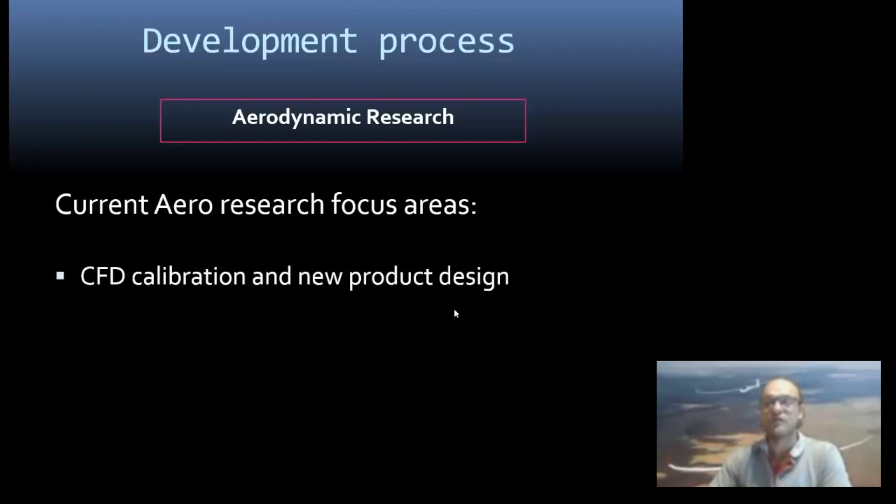The second interesting thing we are doing is using deep neural network frameworks for sailplane design using performance models and optimization. I'll just give a quick overview on this - it's some PhD work we're doing, and the idea is that we're using the computer to do the guesswork of how our profile should look, to stop us doing the guesswork.

And then obviously we're looking into suction, which is also a topic that Dr. Boermans will address tonight, as he is quite an expert on this. But we've also done some research on selected areas to see if this is applicable and if it could improve the performance of sailplanes.

Right, so let's get into a bit of the aerodynamic research. I'll give a quick overview, and I think a lot of you will be very familiar with the terms and might find it a bit boring, while for others it might be something new.

Conventionally we all use wind tunnels to develop sailplanes, and I think Delft University is one of the major players in developing new products with wind tunnels. Initially we also used wind tunnels - ours is at the University of Pretoria - but unfortunately the turnaround time takes about 6 months. Basically you develop a model, insert it into the wind tunnel, and then measure the flows inside the tunnel to understand the aerodynamic performance of your model.

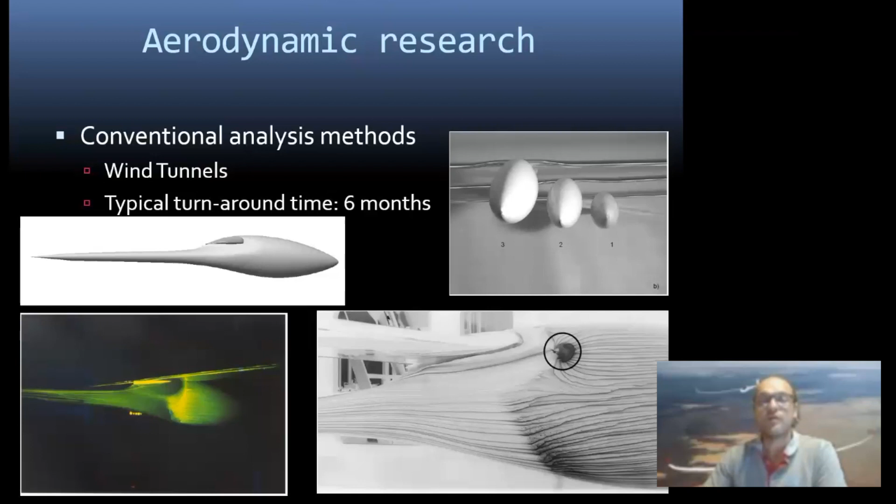The other method we're also using is conventional analysis methods, especially XFOIL, a brilliant 2D code. We're also using the KK Aero numerical panel method procedure to develop complex areas like around the fuselage-wing junctions. But lately we've found that the improvements in these performance areas are almost in the same order as the accuracy of the panel analysis method.

So if we would like to have a 1% or 2% improvement on the profile, the accuracy of these models is also around 2%. You don't really know if you will have an improvement. So we are using some different techniques now.

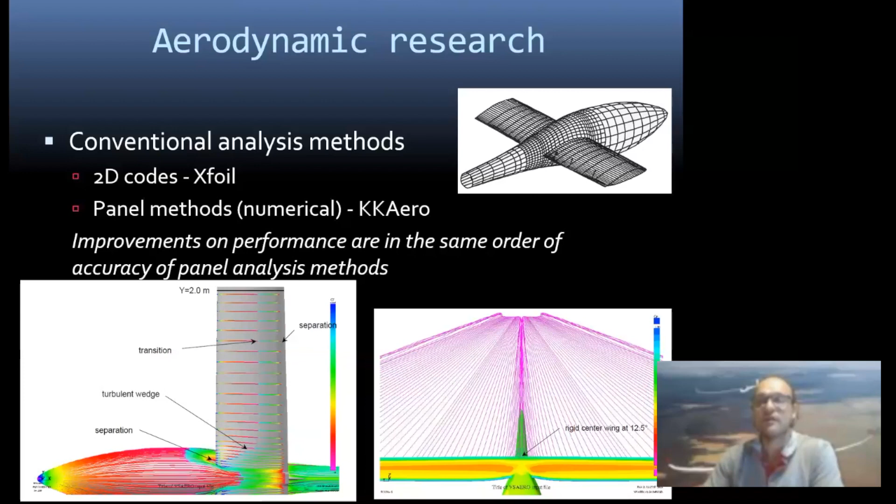This is where we start with computational fluid dynamics, where we're actually using a large mesh for the flow domain. But you have to use big computers, and luckily we have access to the cluster network at the university - they sometimes complain that we pull the complete computing ability of the university down when we run our simulations.

Initially it took about a week to solve some of these iterations, because it's about 8 million cells and 8 million equations that you have to solve simultaneously, and it wasn't possible 10 or 15 years ago. Nowadays, with the computing power available, this method is really a super method.

But maybe I should go one step back and take you back in the design history, to how we designed what we thought was the ultimate sailplane, the JS1. We're looking at around 15 years back on this story.

What we thought to do is model everything we're doing - we set up mathematical models to predict what we're going to get, and from those mathematical models we try to predict and design high performance sailplanes. So far we weren't very far out with our modeling, and we think that modeling saved us a lot of time. Basically, to design the best sailplane, you have to optimize the cross-country speed.

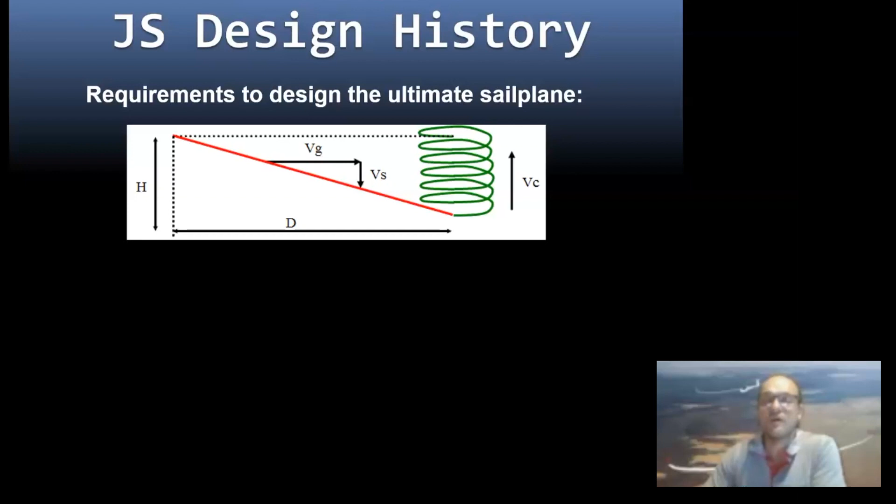We said the average cross-country speed was derived with a certain formula, and if you can optimize this formula, you will have the optimal sailplane for cross-country. We're still using this method in principle, but nowadays we use very complex integrated methods that take weather models, thermal models, and sailplane models into account. In the end, we see what the typical average speed is over different types of days, and what average thermals on what type of days will give you a contest win. So it's more about winning a contest than it is about designing for best L over D.

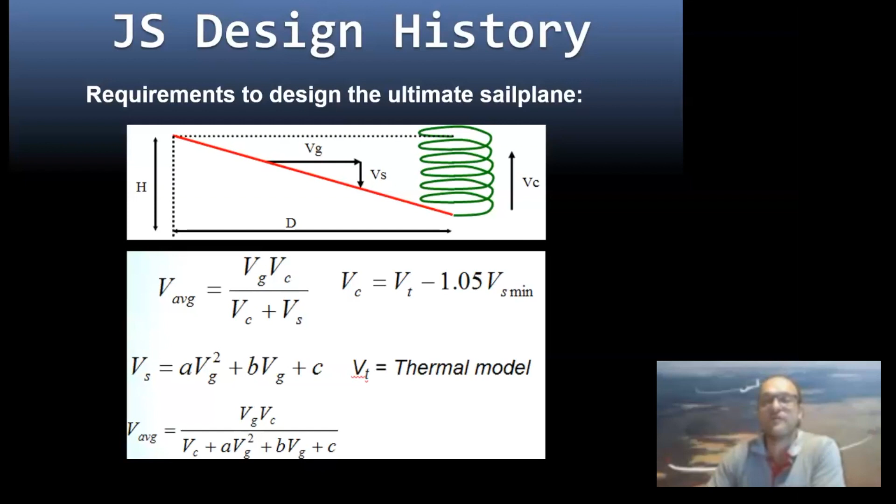Let's go a little bit further. Once we completed the design of the JS1, we calculated an L over D of 53, and this was actually confirmed by the Idaflieg that it achieved this. It had a very good sink rate, about 1.6 meters per second at 200 kilometers an hour, which we thought was a good glider. Then we thought, how do we improve on this glider?

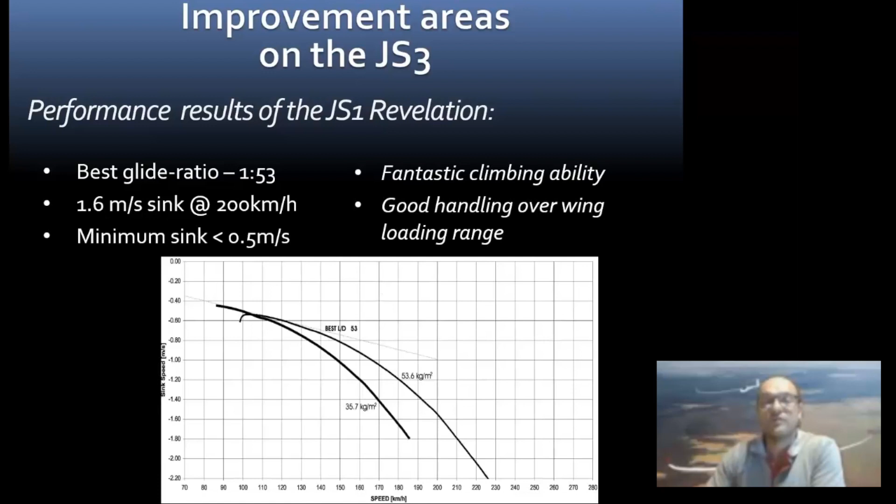This is where we started to look at it, and we call it the JS3 challenge. How do we improve on a good glider like the JS1? We looked at optimization of wing profiles, and this is where we come in with the integrated design of profiles, not just by defining a best profile. We're looking at what is the best profile to win a competition.

Obviously, we look at planforms. An elliptical planform is the best, and elliptical lift distribution is quite the best, so we are really pushing hard to get as close as possible to elliptical planforms. We always try to maximize the aspect ratio, because then the induced drag is limited, but this is very much limited by the stall speed requirements and by the limited span. So if you have an 18-meter aircraft and you want to optimize the aspect ratio, you normally run into area problems, and then your area is not big enough.

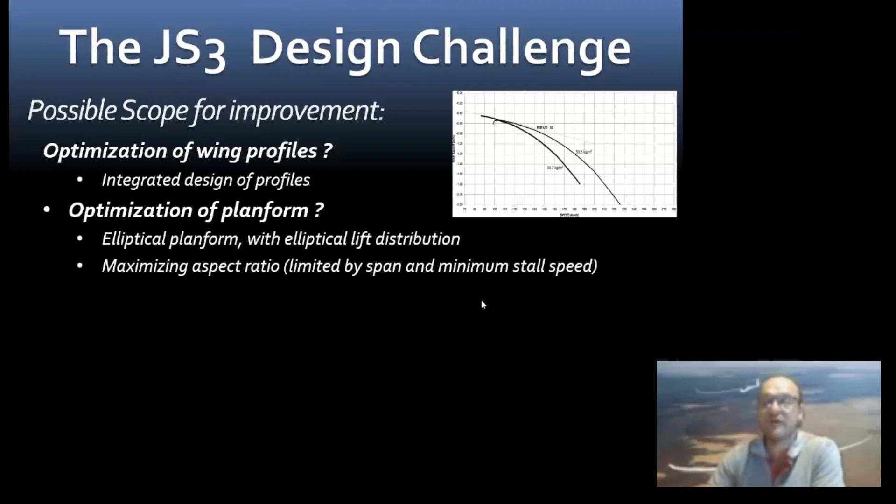So with the JS3 we aimed for the ultimate aspect ratio, managing the minimum stall speed requirements, which means a higher wing loading. We've proven with the JS3 that the maximum certified wing loading is 60 kilograms per square meter, and you have to design a profile with a much higher maximum CL if you want to go higher than this, but then you won't have very good high-speed performance. So with a high-speed performing profile, 60 kilograms per square meter is what we think is the maximum.

This is really where CFD tools came in very handy. So what are these complex flow areas we're talking about? Wing junctions, winglets, cockpit ventilation, fin-fuselage junctions, control horn fairings, tip wheels — those are the things we could solve with CFD in a very efficient way. We're going to run through a quick exercise to see how it works.

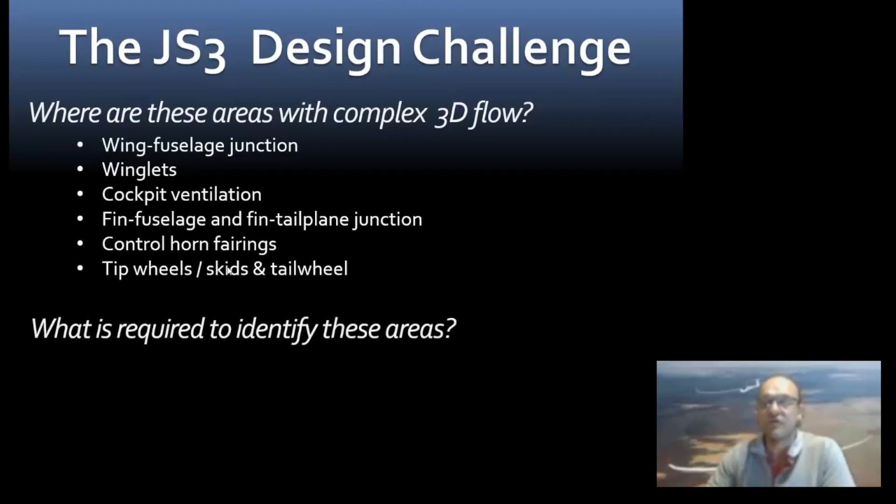We actually need a calibrated CFD tool, not just a normal CFD tool, because we need to predict the crossover from laminar to turbulent flow if we want to take advantage of these CFD tools. This is typically what a CFD will show you — where these crossover points are. This is not so easy to achieve, as these tools have to be accurately calibrated. We'll quickly talk about how to calibrate them, since that was one of the questions from the audience.

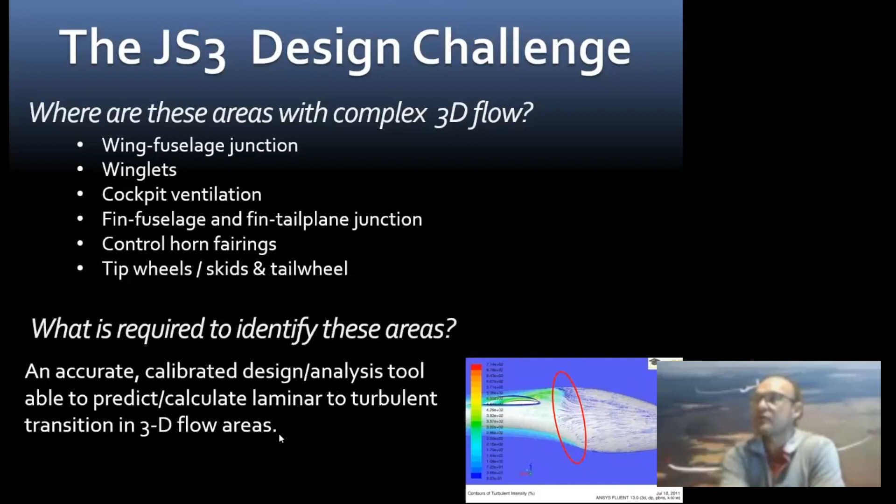But let's first put drag into perspective, because I think all designers, if you would like to increase the performance of the aircraft, really need to reduce drag. We thought that for the next generation 18-meter class glider, which we call the JS3, if we would like to have a 2-point increase from 53 to 55, what is required?

Let's make an example. Best glide is 110 kilometers an hour for a glider of 600 kilograms at 53 times G. It means there's about 111 newtons of drag to achieve that 53. And if you would like to have a 55, and you multiply this into the equation, you'll see that you need a drag reduction of 4 newtons to achieve 107.

This is what we initially aim for, to see how we can save Newtons of drag. Typically, that same efficiency at high speed will require much higher loss in drag, so we would need 8.6 Newtons of drag if we'd like to have a similar performance increase.

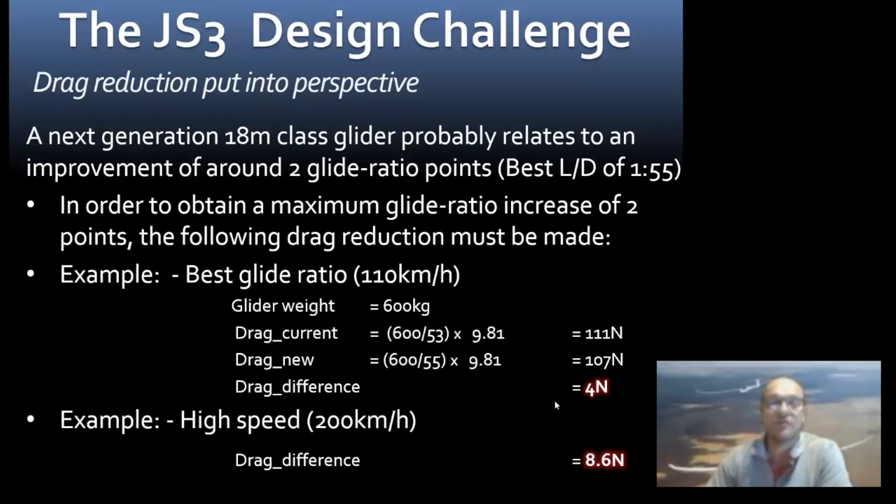Okay, let's see how we address these things. We looked at CFD, and I think all of you know nowadays what CFD is, but it was not able to predict these laminar to turbulent transition areas, and it was not really suitable many years back for sailplane design. But now with new transition prediction approaches in CFD, this is actually possible.

And this is what Dr. Johan Bosman in his PhD really looked into, how to tell the software where the transition areas would be.

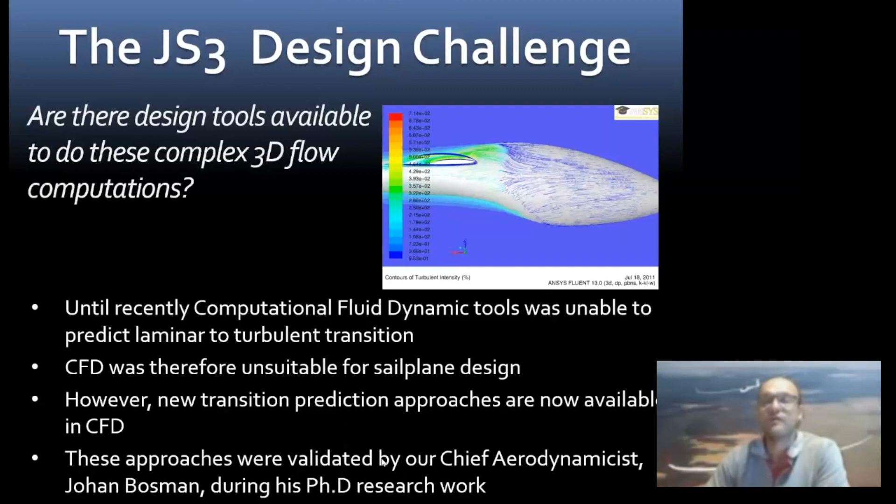So we all know that CFD is basically just a numerical wind tunnel. As you put a normal aircraft or model in a wind tunnel, you can put a numerical model in a 3D wind tunnel, which we call CFD, and you get very similar results. So let's have a look at the comparisons between a CFD approach and a wind tunnel approach.

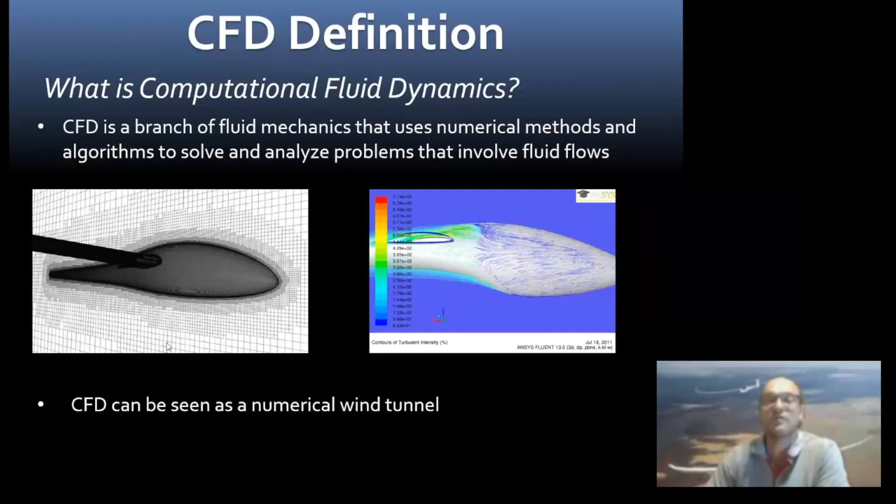In the wind tunnel, first, apologies, I don't know how to scroll up my presentation there. First you build a wind tunnel model, and this takes a few months to make it accurately. In CFD, you just generate an accurate CAD representation.

Then in the wind tunnel approach, you select a wind tunnel and test section, and here you generate a flow domain with boundary conditions. In a normal wind tunnel you select the wind tunnel test conditions.

Here you set up your flow parameters. You run the wind tunnel. Here you just press solve. Instead of running an expensive wind tunnel with lots of wind and noise, we just push a solve button.

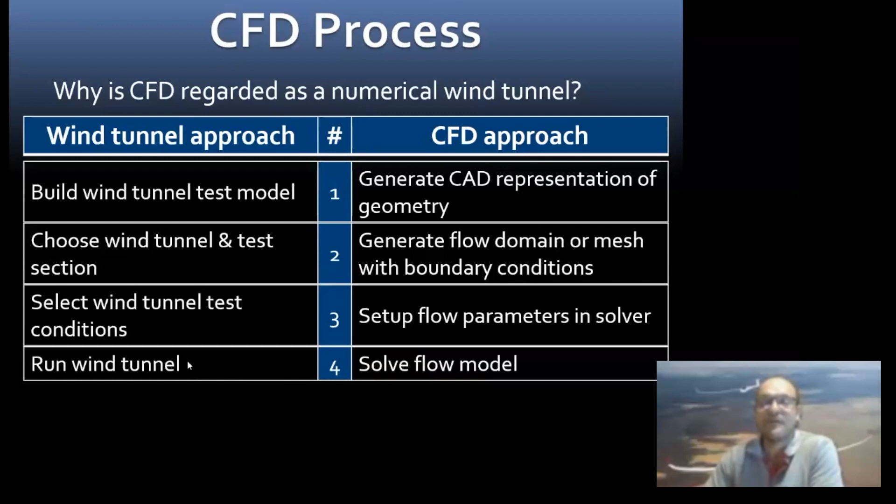Then we analyze the data, and you also analyze the data, and you repeat this step in an iterative process until your design is good. This is where we come in now with our neural network that we're busy developing, to bypass these steps of doing it manually.

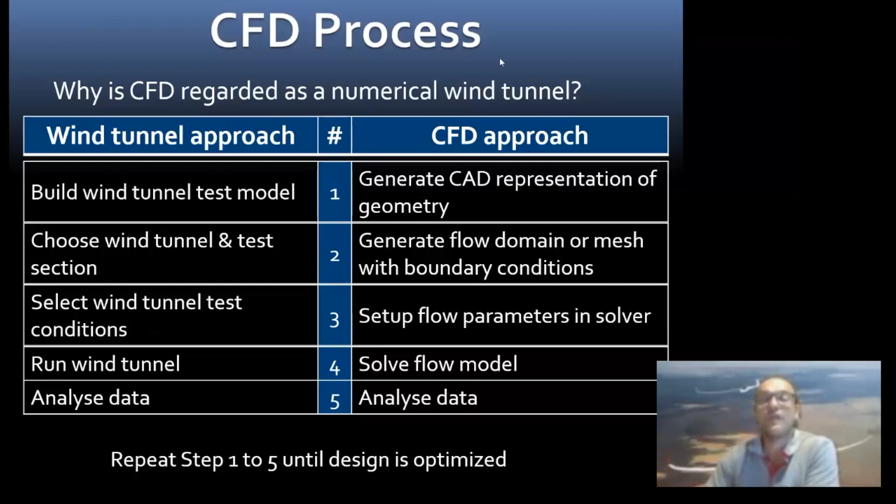So if we look at the transition models, as we just talked about, the CFD models cannot predict the transition accurately. Why is that? Because the Navier-Stokes equations are too complex to solve numerically. They have lots of terms, and these terms need to be truncated to make it solvable for computers. Because you solve it this way, you lose certain attributes of the formula, mainly the transition point.

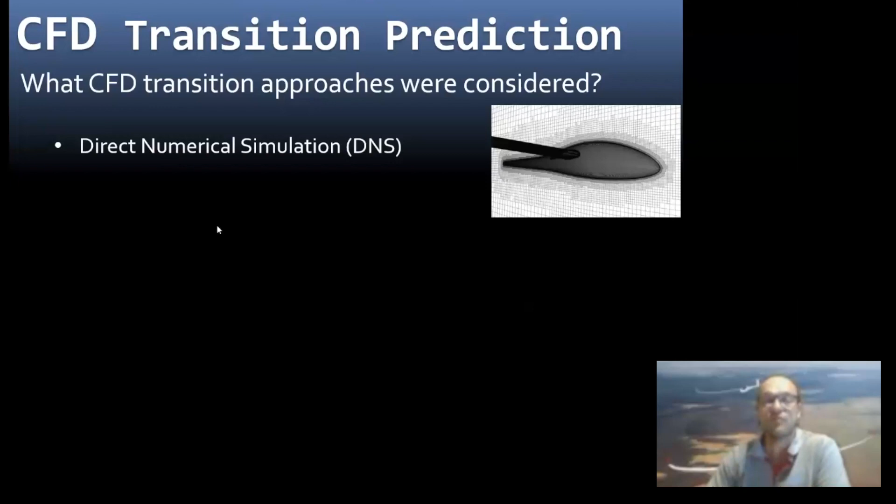Therefore you have to actually tell it where the transition from laminar flow to turbulent flow is. I hope Dr. Boermans will correct me if I don't say it exactly correctly, but there are a few ways how we could do this - how you do the Reynolds average, I think we're using these methods to tell the computer where that transition point will be. So the Reynolds method proved to be feasible, and the Walters model as well was chosen for certain validations of our simulations.

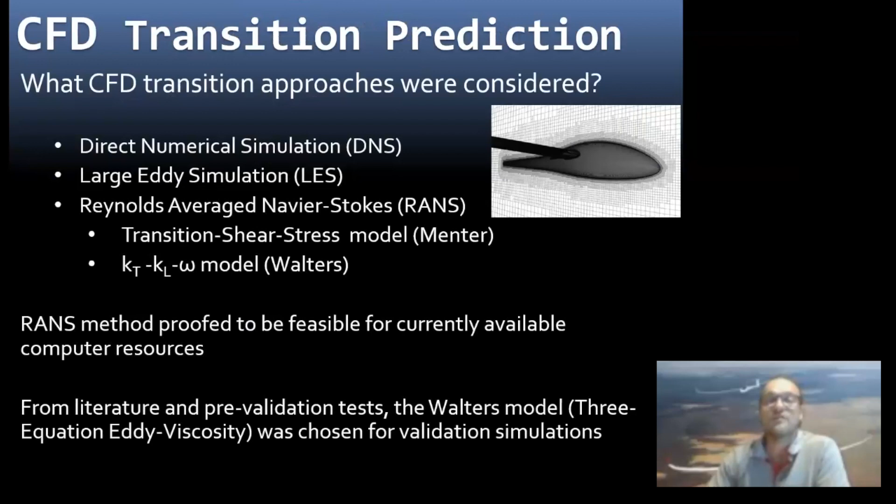Okay, but you have to validate it. Once you have selected the transition model, you have to validate it to see that you are predicting the transition from laminar to turbulent flow accurately. Therefore we looked at two cases which are very well known - we first did a 2D validation, and then we did a 3D validation. For the 2D validation, we used a very well-known profile, the NACA 653418.

We used a NACA profile where the measured data in wind tunnels is extremely well known. The NACA profile has quite an extensive, large laminar flow area with laminar separation bubbles on both the top and bottom surfaces. Obviously the drag decreases for larger Reynolds numbers, and tests were carried out in turbulent levels and the same conditions as experienced by an airfoil in a sailplane.

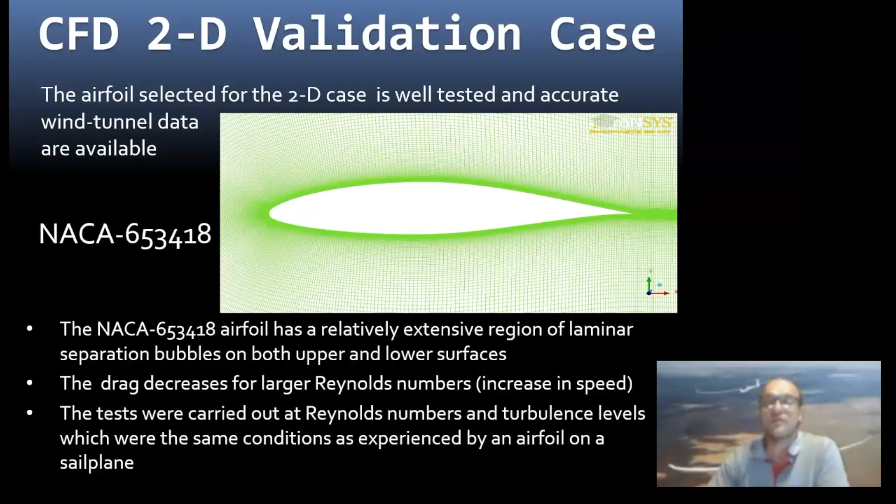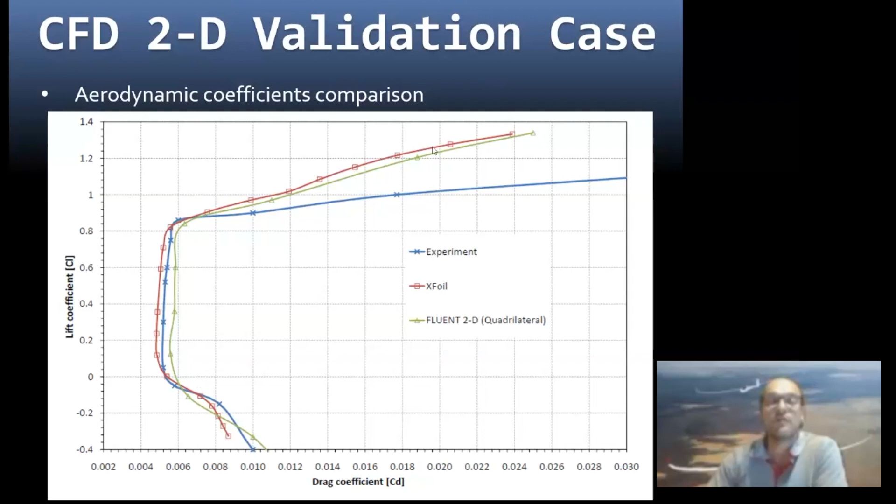So we used a few things to calibrate it, and I'd like to say that Dr. Boermans says we are continually working to improve the accuracy and the transition point optimization of the models, of the CFD models.

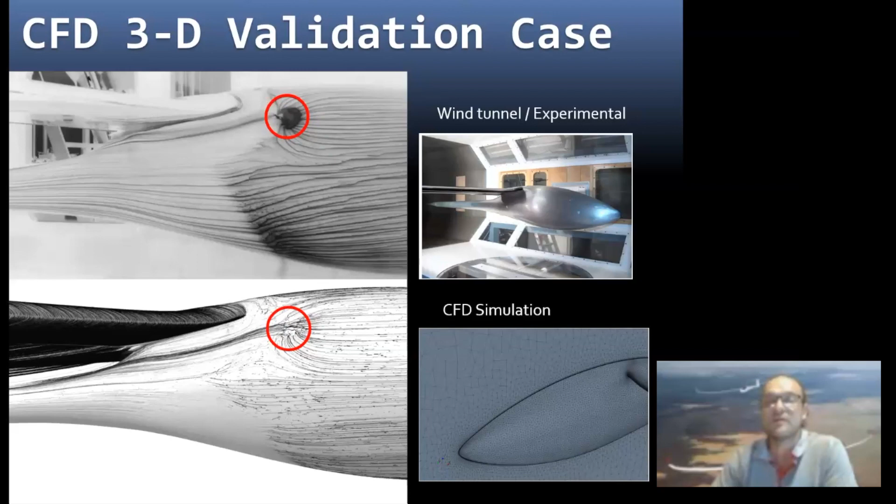Here you can see how it looks in the wind tunnel, and this is also a good indication of where the transition point is sitting, and this is what the CFD model is predicting. So once you have real calibrated CFD data, you can for the first time actually use it. If you just use a normal CFD package without calibration, you'll have beautiful pictures, but you'll never know until you fly the aircraft. These are validation cases - you can see the wind tunnel data compared to the Fluent simulation is very accurate.

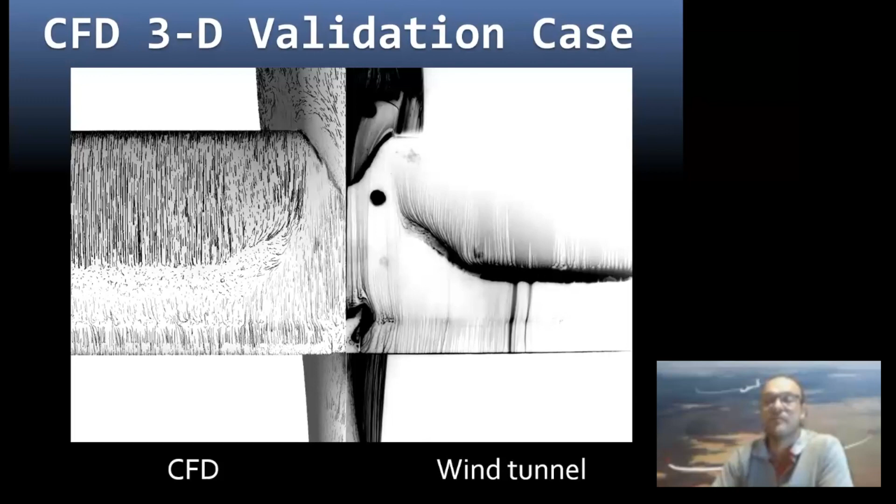And therefore, I think it was really the last 10 years that we've been intensively doing CFD design work, and we don't use wind tunnels any longer.

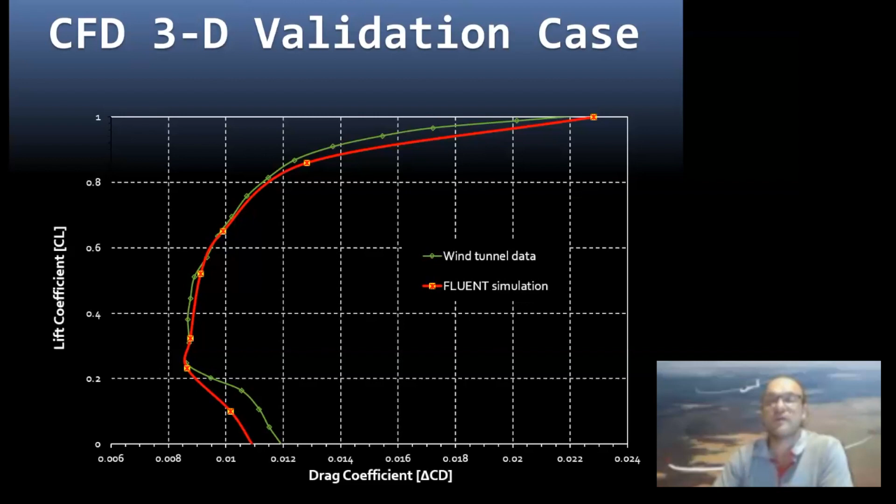So what did we do with this CFD tool once it was calibrated? We looked at a few options where we could optimize it. First we looked at the position of the wing, and it looked like we could have a reduction of 3 newtons just by moving the wing to the correct position.

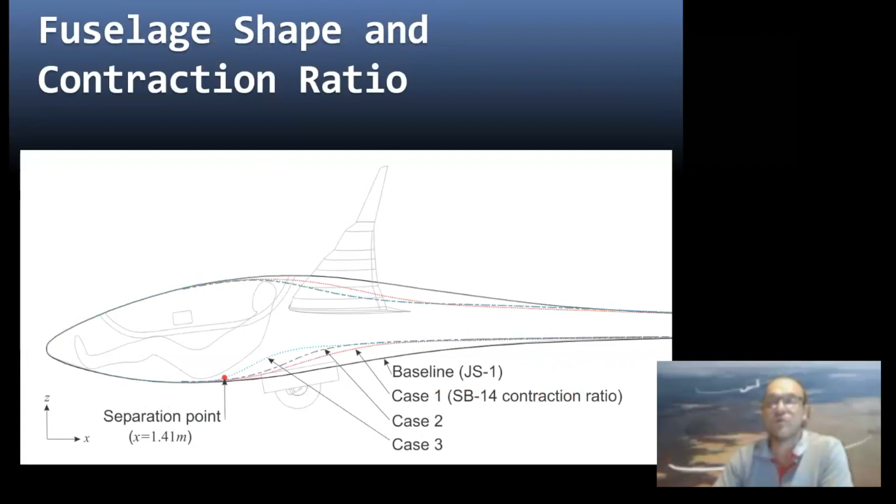We looked at a few baselines - the JS1, the SB14 - and then we also looked at 2 other cases to see what contraction is required to optimize the drag. We actually thought the quicker contraction would be best, but after running simulations we saw that case 2 was actually the best. It was not the smallest case, but this model gave us the best drag reduction of about 5 newtons. So we implemented the JS3 looking more at case 2.

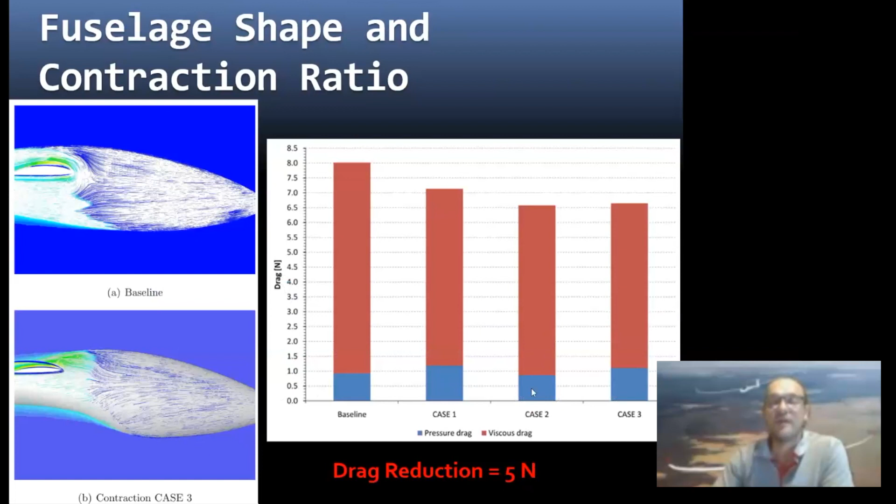Then we also looked at cockpit ventilation. This we had already implemented in the JS1. For the JS3, we had to move it to a less ideal position at the bottom of the fuselage, but the reduction according to our CFD was in the order of about 0.3 newtons. Not a lot, but it's there.

Then we looked at the control horns at the rudder positions, and we also used CFD for that - we looked at the flow and had a reduction of 0.4 newtons. Then we looked at changes in the fin area, and there we found 0.5 newtons.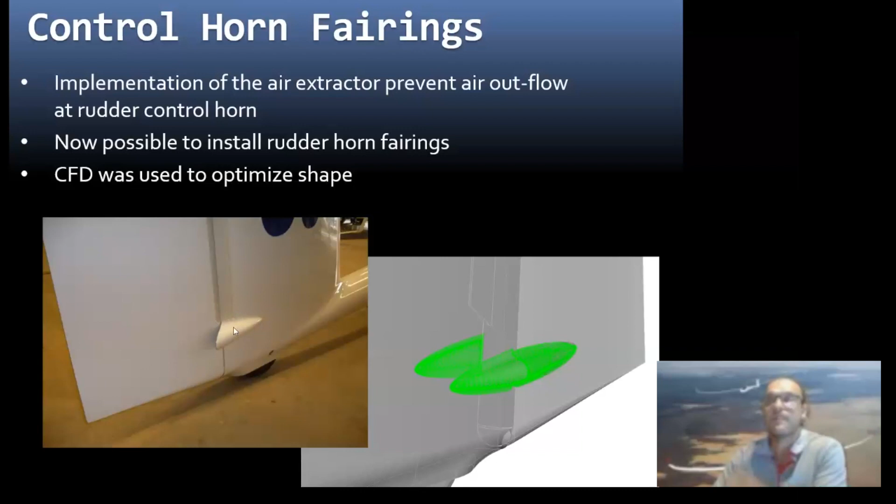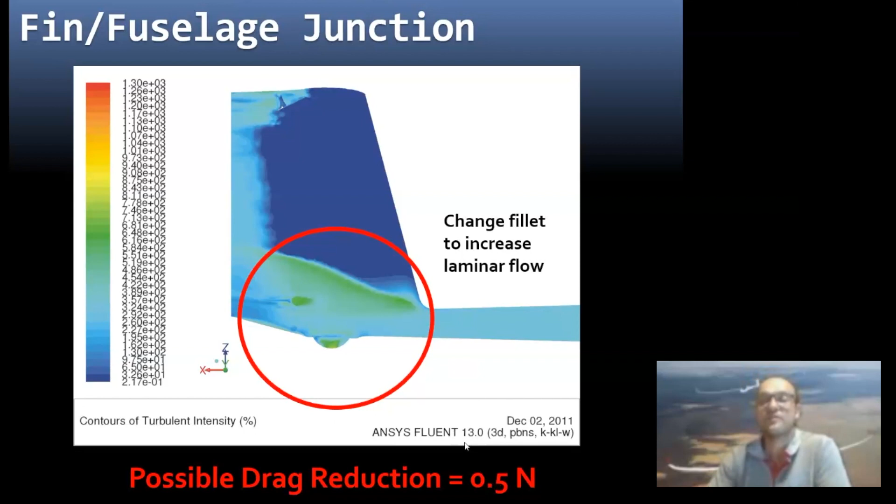The other one I didn't mention was root suction. This was one area we technically could not work out with the bug wipers in place, so we had to choose between root suction and bug wipers. But you can see that we could actually achieve 9.8 newtons of drag reduction for the JS3, except for that 0.6 that we could not implement.

Now, if you reduce the drag by 9.8, your glide angle increases from 53 to 58. So we could not get to 58, but our latest test results from the IDAFLIEG with the JS3 showed that we got to 57. So it shows that even with the data available from the IDAFLIEG, we managed very close to what we thought was the maximum performance available in a JS3 with the current technology.

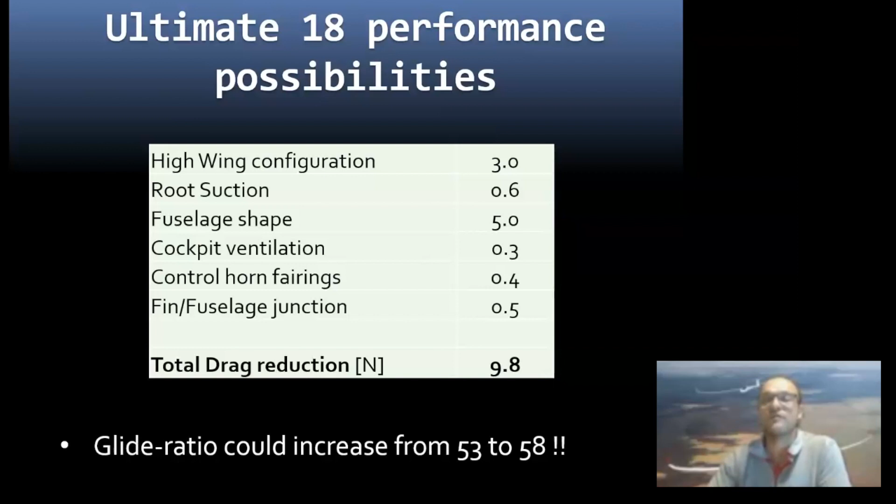So our CFD really proved the results, and thanks to the IDAFLIEG we could validate these results. Now we have a nice tool we can make nice pictures with. This is just how we've continued to calibrate our CFD. This is the JS4's winglet already, which we're doing some improvements and design work on.

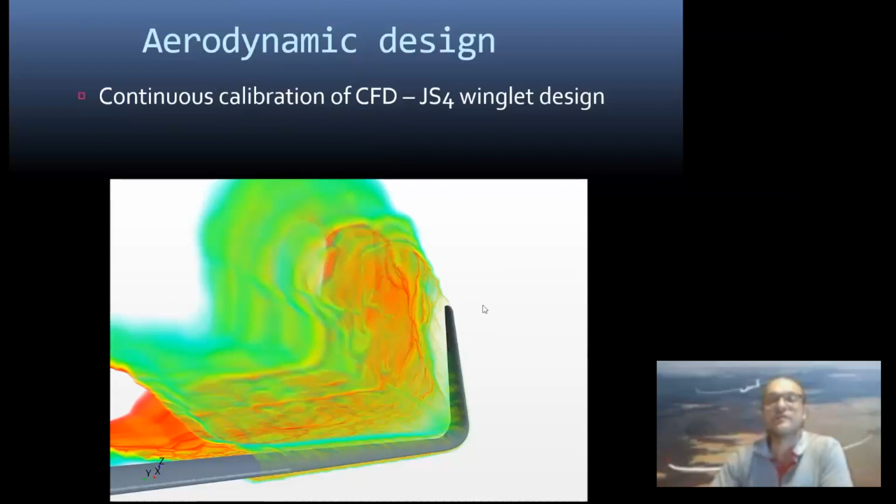You can see how the high wing of the JS3 resulted in some improvement areas. Once you apply all of these techniques, you finally come to an aerodynamic design, which you now have to sell to the structural team and say, can you fit your structure into this minute little shape? Then the conflict starts, because the structure guys always want more area and more enclosed volume, and the aero guys want less. This is where the process could actually start all back from the beginning. If the structural guy can't fit it in, we're back to the drawing board.

We're also doing some research flights. You can see here we confirm flow tests with our CFD results, and there's quite a nice comparison in this. You can also see there's a little bit of influence of the probe on the fin. It's one of the reasons why we moved the probes to the tip of the JS3. Not a massive effect, but there's a little bit of discrepancy that results on the edges.

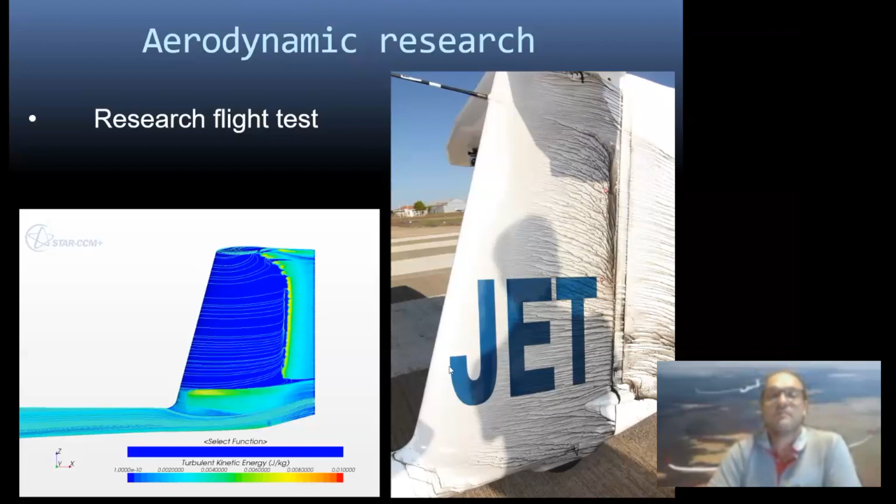If you can use a different method to do this guesswork, we can do it much quicker. This is one of the PhD studies we're currently busy with at the university, using a deep neural network framework for sailplane cross-country performance. I'd just like to explain what we think we're going to do here.

So basically we start with the seed profile and parameter constraints. For example, the structural guy will say you cannot go thinner than this, and the wingspan cannot be longer than this if it's an 18-meter span. Then we start off with the seed profile, the initial profile, and this is where we allow the computer, using neural networks, to design the profile.

Normally profiles are just designed using XY coordinates. If you look at a certain section you have those XY coordinates, and you have to define quite a huge number of coordinates to define the profile accurately. On a normal sailplane profile, I'd be uncomfortable with less than 2,000 coordinates, because with small straight lines you won't have an accurate one. I'd guess about 2,000 points would be close - I'm being corrected, it's only 200 points. With 200 coordinate points on the profile, you can actually solve it.

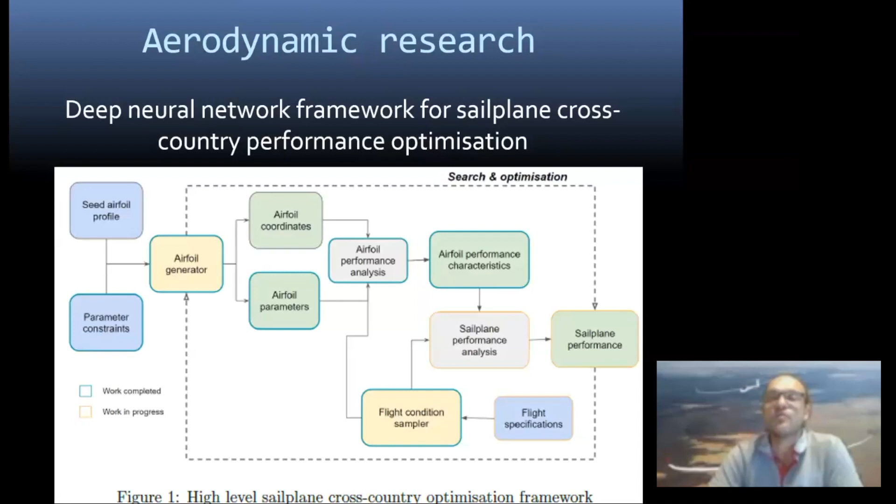One of the other studies we've also been doing is on suction. We've been following what Loek Boermans is doing with suction, and it's quite interesting - we're quite excited about the work that's been done in suction, and it could actually result in major performance increases.

However, the technical question is still not solved. But we looked at what areas we can actually solve. So we selected the fin to see what the performance scores are if you actually use suction.

So now I'd like to go back a little to where we were earlier in our design process. As I said, we did aerodynamic research. I showed you how we do the aero design using a bit of CFD - I can actually say a lot of CFD, or almost only CFD at this moment. And then we hand it over to the structural design guy.

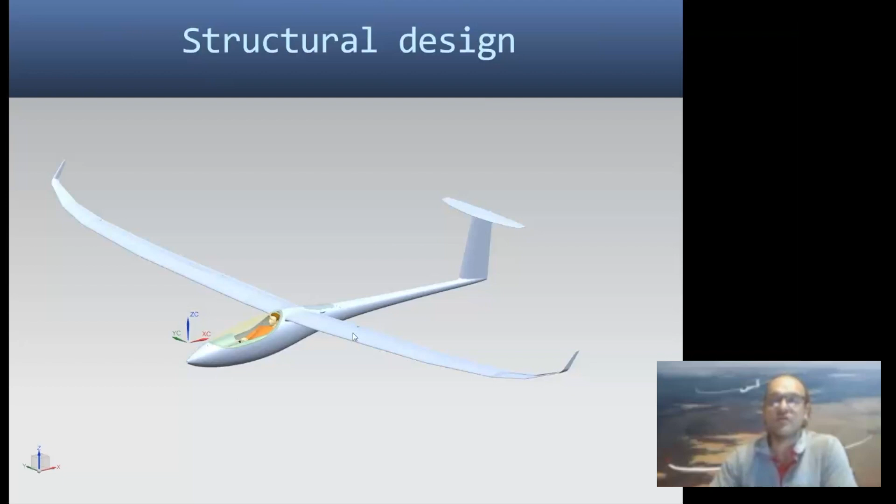This guy is where the conflict starts, and he needs to first design for the fuselage, for example a stress skin design where all the loads are transferred and required inside the skin. He needs to do a bit of structural reinforcement in the cockpit area to meet the 9G requirement. As you can see how this is developed here, this is to transfer all the loads from the fuselage into the wings. You see a couple of bulkheads for the engine.

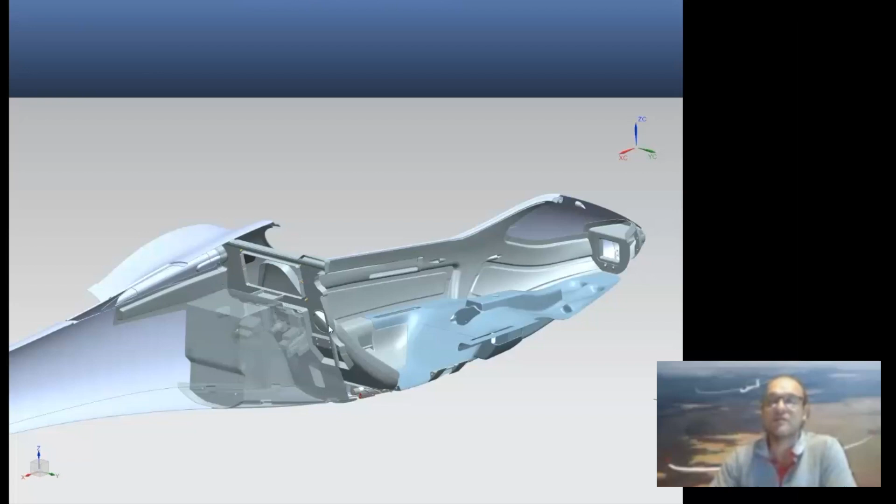And then we run our FEM analysis on the structural analysis. So we mainly do FEM analysis backed by hand calculations. And then ultimately we test the structure with physical tests for certification. It's a bit easier to convince the authorities if you do an actual test than to give FEM results.

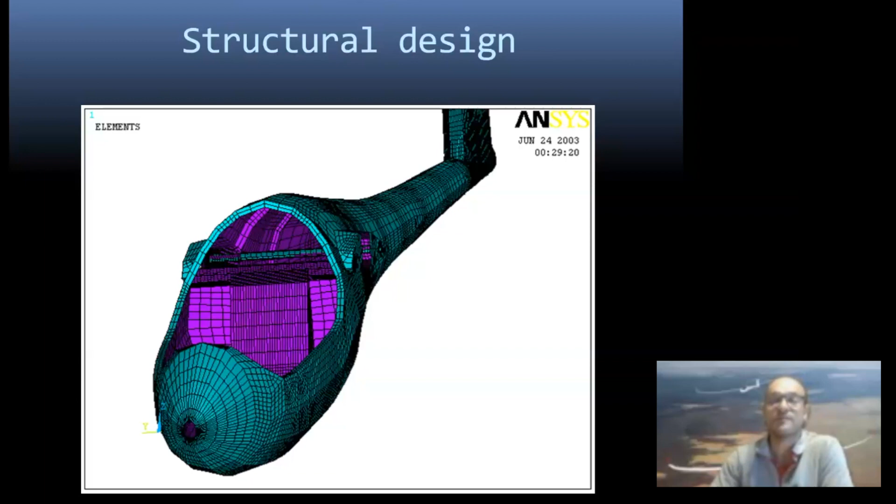And then the detailed design follows. The detailed design consists normally of the control system design, the aerodynamic design, the ergonomic design, and the power plant design. So if you just look at one system that I've selected, for example the landing gear.

Traditional methods would have shown you - if we just use normal methods, we're using a lot of Excel to model again. So everything we're doing is done by Excel. Even though we're using expensive software packages like NX from Siemens and could do modeling in quite a nice way, you have much more control if you do the design in Excel.

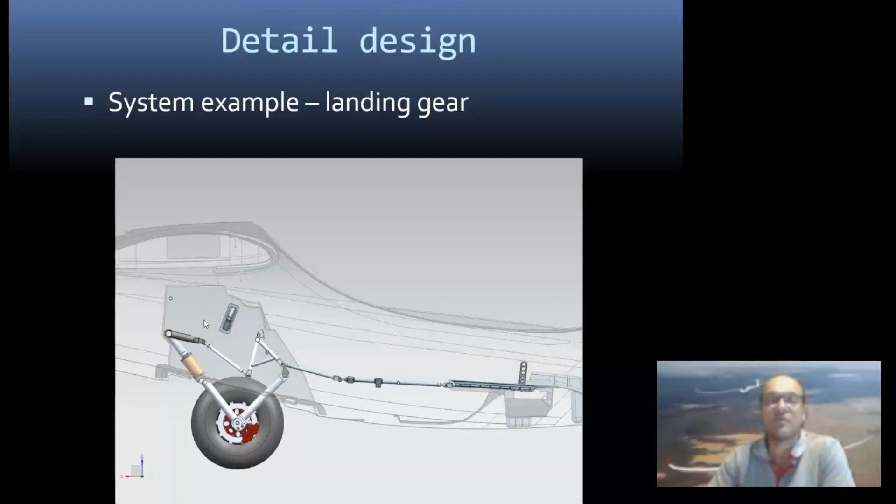So for example, if we designed the landing gear on the JS1, we modeled it and actually made graphics with a slide bar showing how the retraction and extension of a landing gear works. And then all the loads are telling you what the hand load is, so you could see how hard the landing gear would be to retract.

But by manipulating it with a few other bell cranks, we actually designed the JS1, JS3 landing gear so that by the back end of the lever, where you don't have a lot of forces, the forces drop to zero. And this makes it very comfortable to retract, even for the smaller or female pilots.

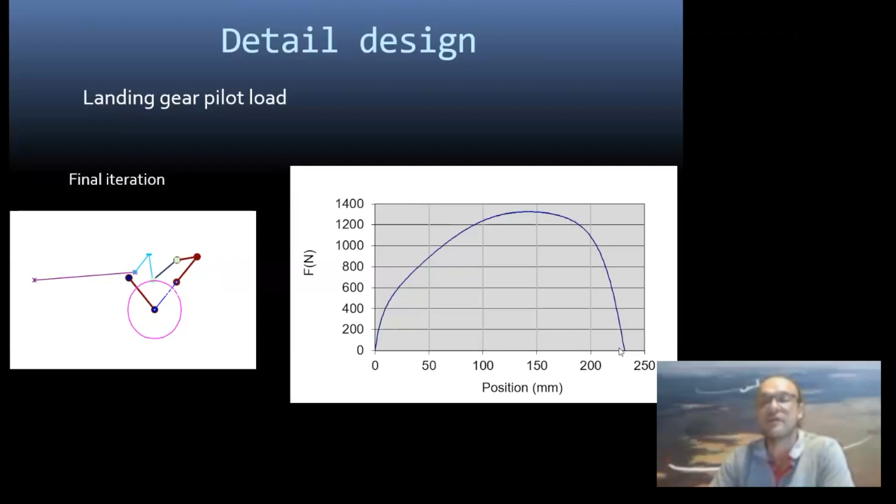As you can see, a very small shell, and everybody's fighting for space. If you can now imagine, you have to fit in a wheel, a control system. You need to find room for the seat pans, the seat back, instrument panel, cockpit, and then even you have to fit in, as we like to call them, the idiot behind the stick.

And most of the problem is to create enough space for a larger pilot without compromising the aerodynamics too much. And this is where I think with the JS3 we found quite a small cockpit capable of fitting quite big pilots.

The mannequin that we selected here was a 120 kilogram pilot, 2 meters tall, if I recall correctly. So we aim for 120 kilograms, 200 centimeters tall, and it seems if they are fitting in.

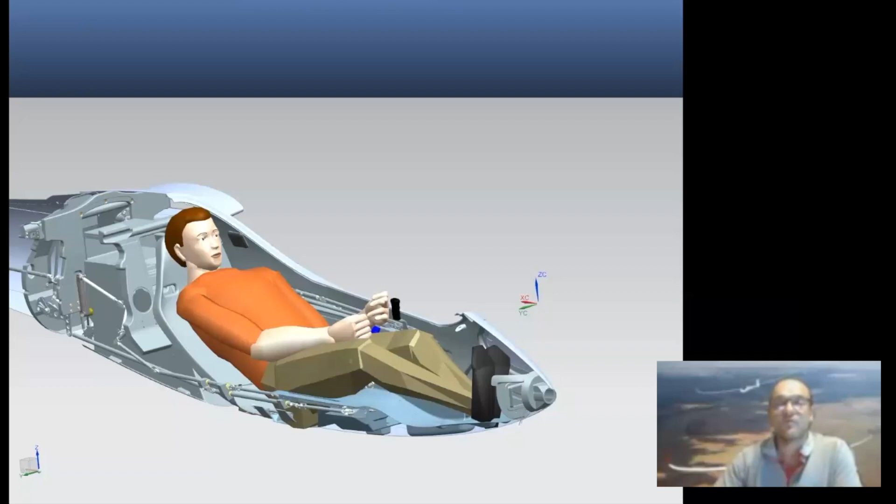If we look into the other structural design areas, you can see how we have to design all these bulkheads and things into it, and also the power plant, in this case the jet one. As you all know, we're busy now with the rear electrical propulsion system, which we will start to integrate shortly.

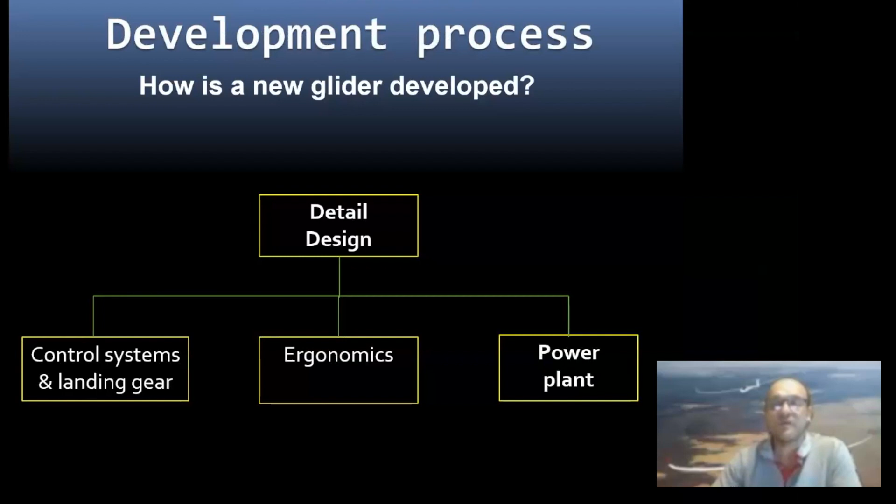We already have tested all the platforms with it, the pure gliders, and the electrical system will be installed shortly. You can see everything is fighting for space here. Once this is done, we move over to prototyping, where the prototyping needs to be constructed. We're running slightly out of time.

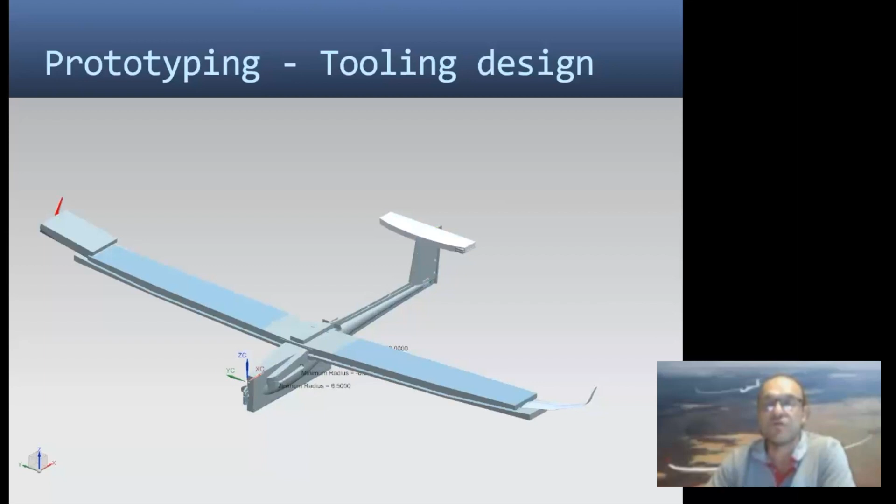I'll just quickly show you how from the model we start to design our tooling. That is the tooling boards and the jigs for the wing molds here. You can see this is typically what a mold looks like, with all the jigs to hold the parts. We have to design tools and jigs to do the integration between the wings and the fuselage.

I can just say that on the latest product, our JS3, the wings were completely built separately, and the fuselage on this side without any integration, and we just push the wings in and they fit without any interference issues. The fuselage is typically looks like this, the plug that we design.

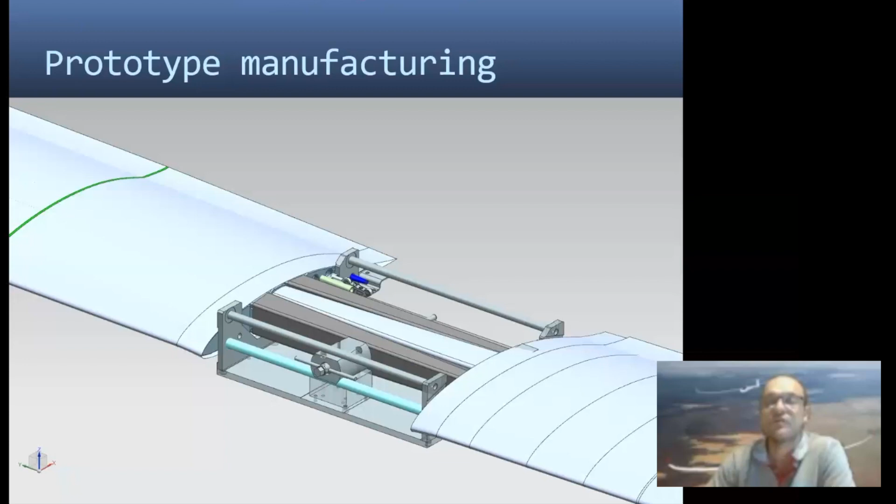And if we do it in real life, we CNC machine it out of MDF, or superwood as it's known in South Africa. The superwood is then carefully positioned on accurate jigs, and then you start to finish this mold by hand. You can see this is the plug now prepared for the mold.

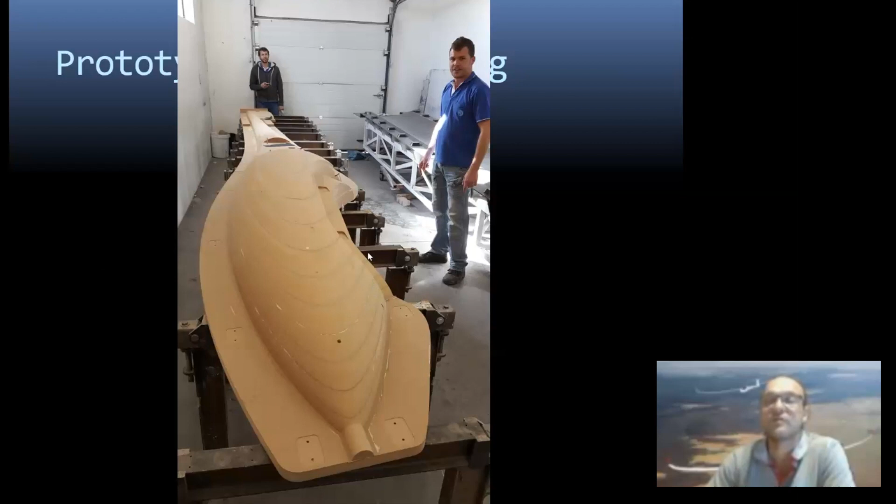And pulling the mold out, a little later you have the actual mold coming out of the plug. This is what a typical mold looks like. Once you've designed a mold in all the inner sections, you spray the mold and start the structure layup. You can see that's the skin there. You do the internal component installation.

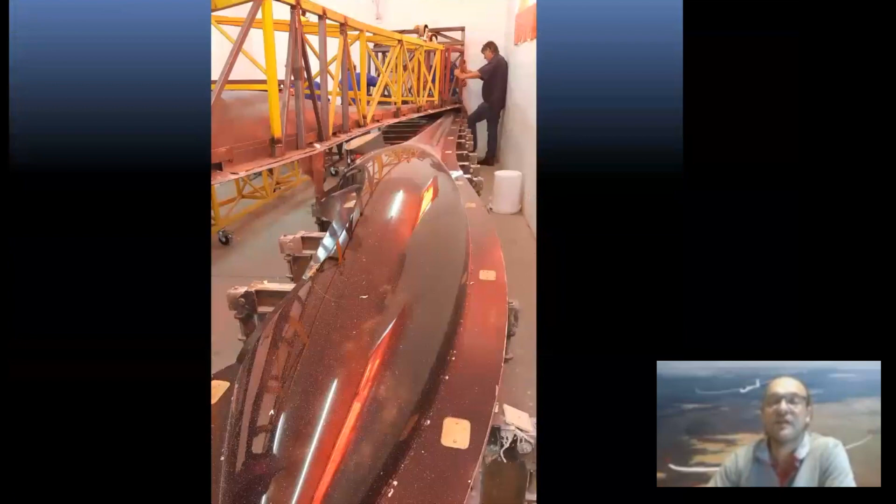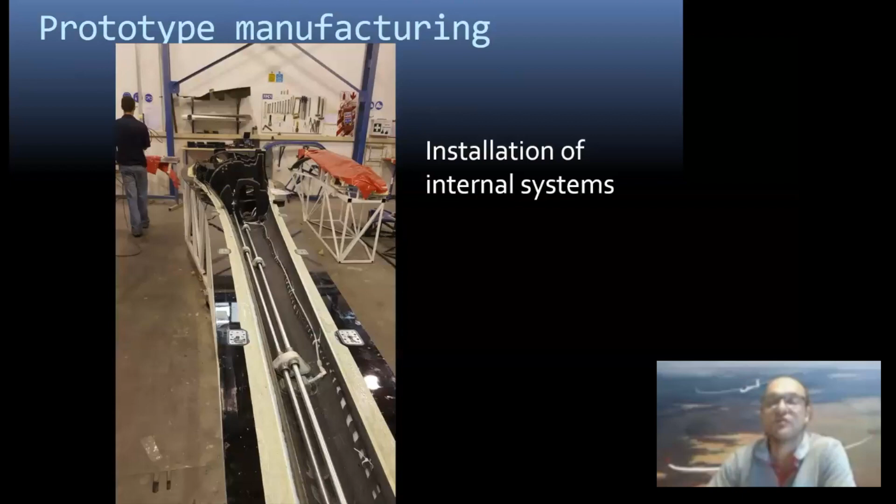And the control system - this is the mixer system in the CAD, and this is the actual one. Then you have to close the two fuselages together, and demold. It looks like not a lot of work, but this could take up to 6 months to do the jigging and tooling correctly.

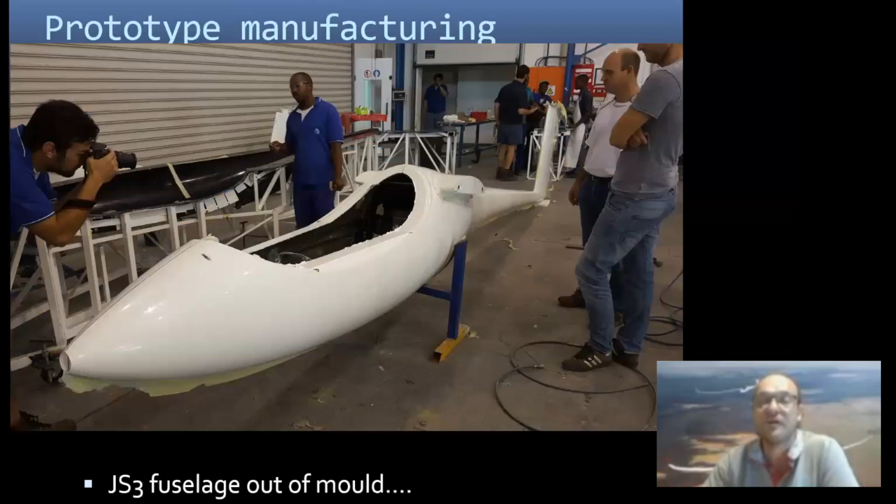And then you have your first fuselage, and obviously the chief design engineer who tried to fit in a 120 kilogram pilot just wants to check if at least he can fit in. At least that would be the first prize. If the chief design engineer can fly his own aircraft, it would have been a bit disappointing if he can't fly it.

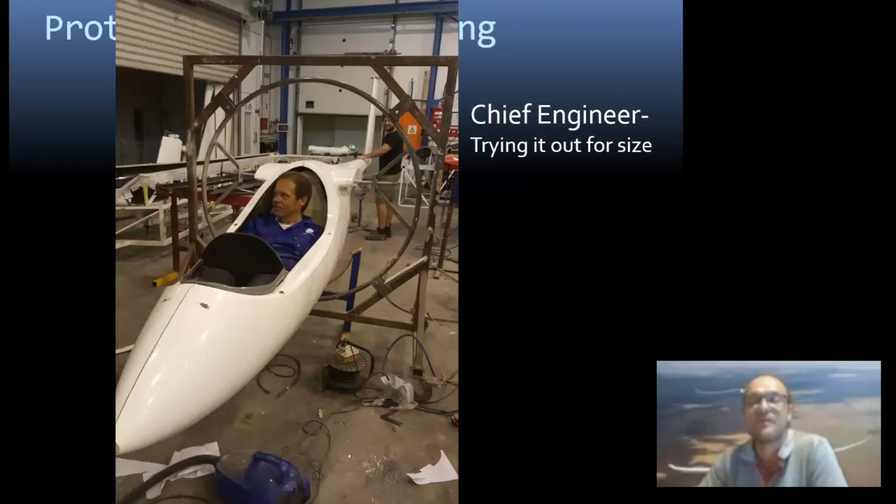As you can see, this was the JS3, the first attempt at integration of the fin to the tailplane. Manufacturing of the wing starts here, and you can see initially we're just using some wooden tools to position the spars and the positions.

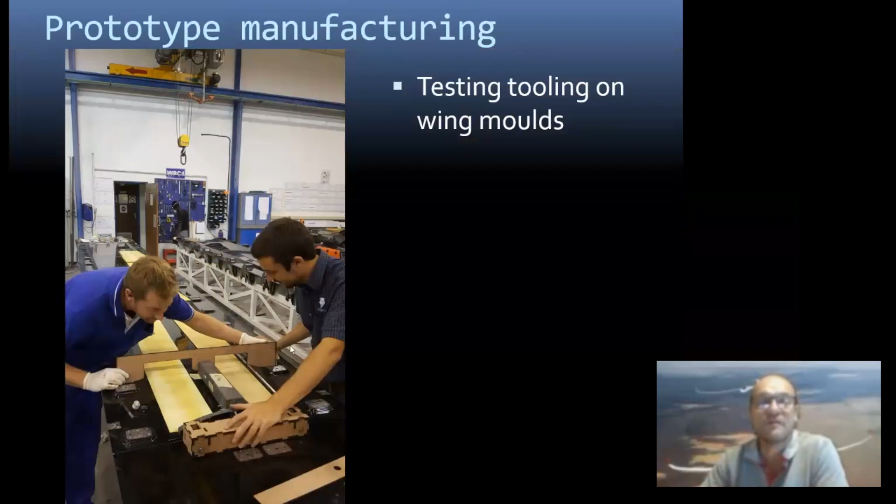You do follow exactly the same process as you would with a fuselage - also some tooling and jigging to position all the parts, building all the parts on the inside, and then the final moment comes: does the wing fit to the fuselage? It's quite a stressful moment for everybody, because the design engineer knows if this doesn't fit, we're going back to the drawing board for a very, very long time.

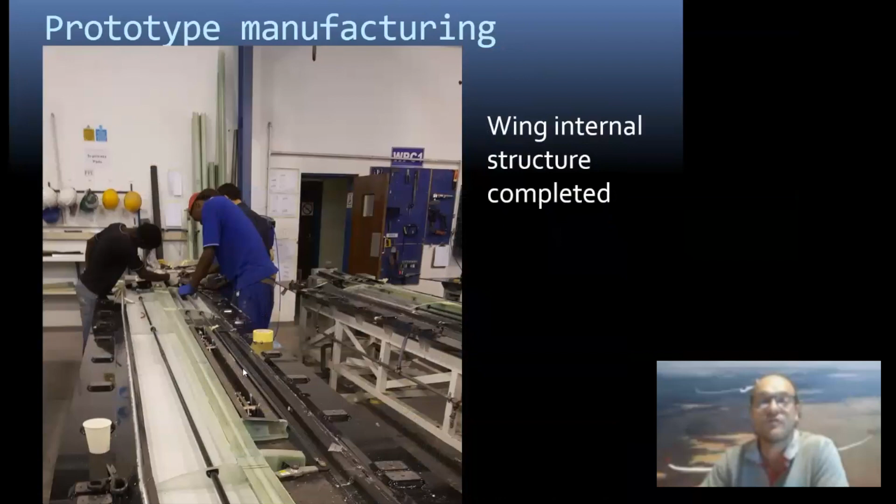You can see there's the first fit of the wings to the fuselage, and then suddenly it all works, and you go to the paint shop, control system installation, instrument installation, and finally, in the middle of the night normally, the first product is ready. So this is the design process just summarized in a very, very short program.

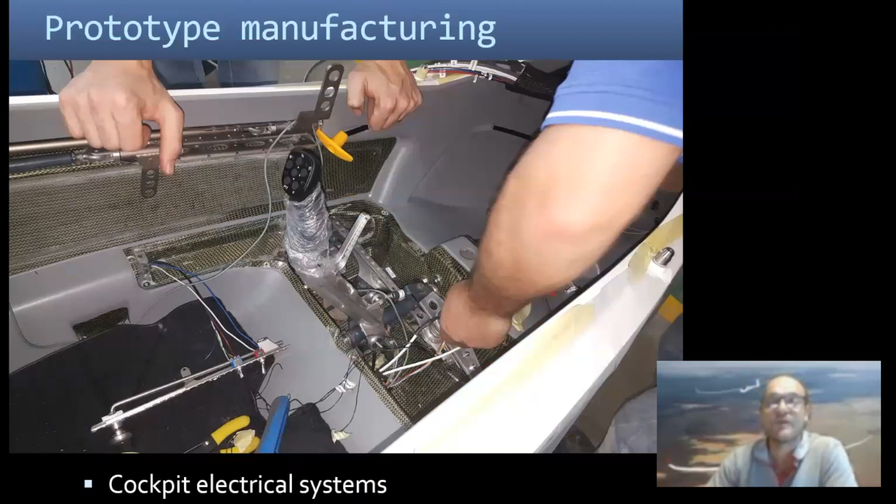This is the JS3 in the 15-meter configuration. I just want to mention this whole aircraft was built in 4 weeks - it's all we had before we went to Benalla in 2016. And after this, the testing and certification starts, which took another 2 years.

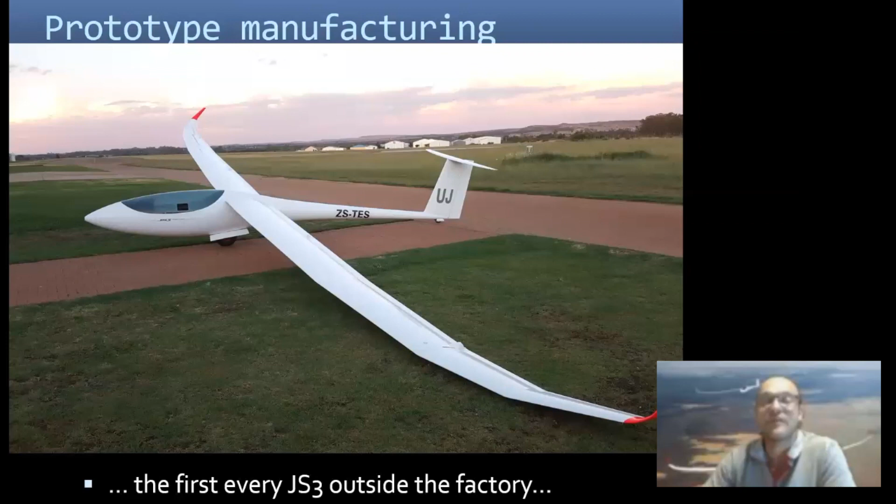The certification base, as you all know, is a few items that you have to demonstrate to the authorities to show that your aircraft is safe. We're not going to go into that because we're running slightly out of time, but I just would like to show you, and then we start with the certification flight testing.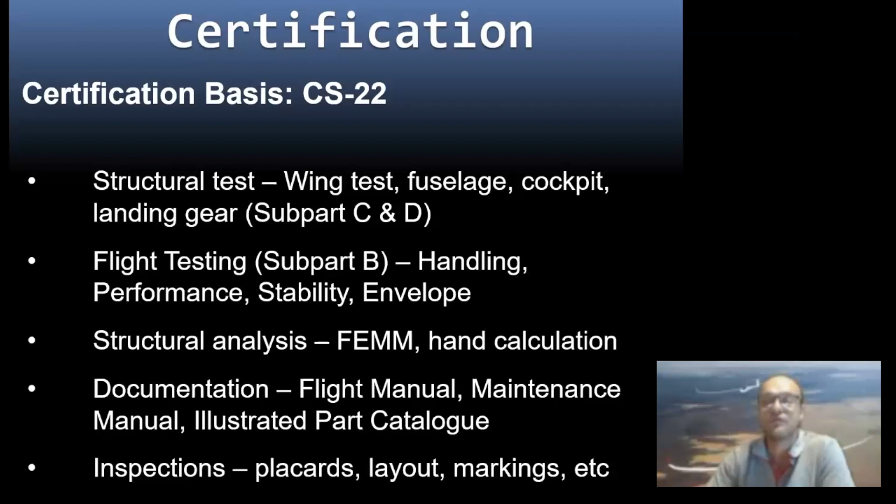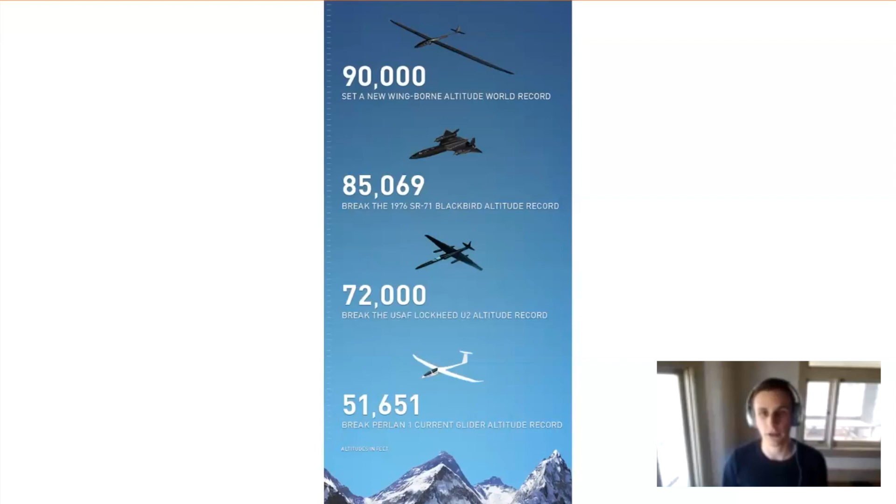The second goal of the project is to do atmospheric and scientific research into the mountain waves, stratospheric waves, and the polar vortex. The Perlan glider is instrumented with ozone measurements, temperature measurements, humidity measurements, and we can feed these back to weather models and learn a lot more about the polar vortex and stratospheric mountain waves. This is crucial to help us understand weather phenomena, because it's believed that the polar vortex, into which the Perlan Glider 2 flies, has a major role in the ozone depletion mechanism.

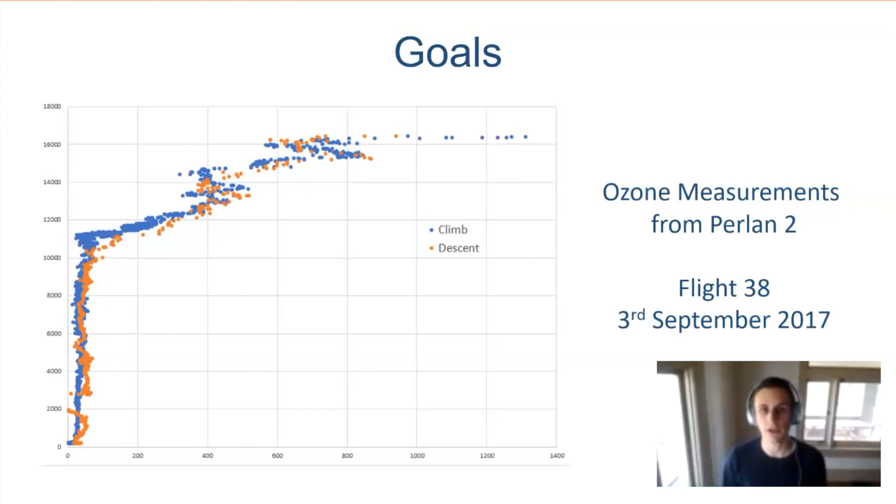Finally, the third goal of the Perlan Mission 2 is to inspire the future generation of scientists, pilots, and engineers. An example of this is the partnership we have with an organization called Teachers in Space, where we organize a competition for school students and university students to design CubeSats, small cubes of 10 centimeters by 10 centimeters by 10 centimeters, which we then put into the science bay of the glider and fly to stratospheric altitudes to perform the experiments.

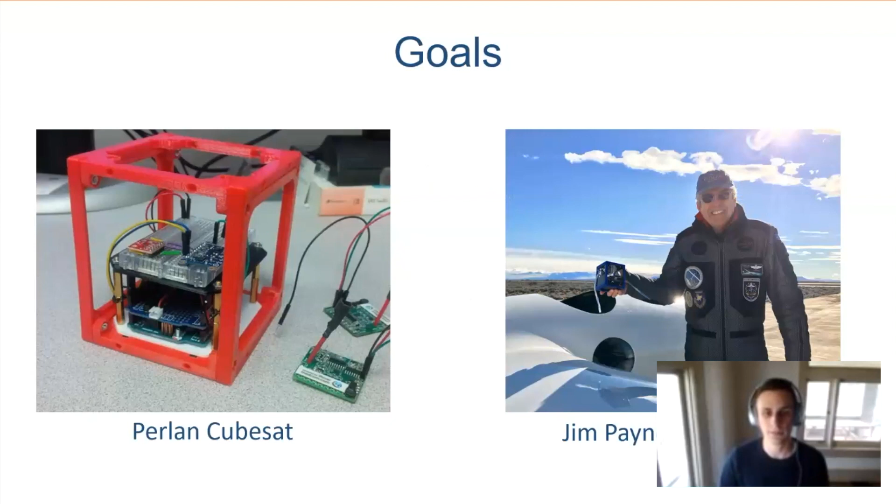So these are the goals of the mission, but how exactly is it possible to go this high without an engine? The answer is thanks to a combination of mountain waves and the polar vortex. Mountain waves can form on the downwind side of a mountain range when there are strong winds across it. These winds, when they bounce against the mountain, create regions of lift and sink which you can use to gain altitude. It's a bit analogous to surfing in the sky.

This polar vortex can take the mountain waves in the troposphere and extend them all the way to the stratosphere, creating a phenomenon called stratospheric mountain waves. These stratospheric mountain waves can extend as high as 140,000 feet.

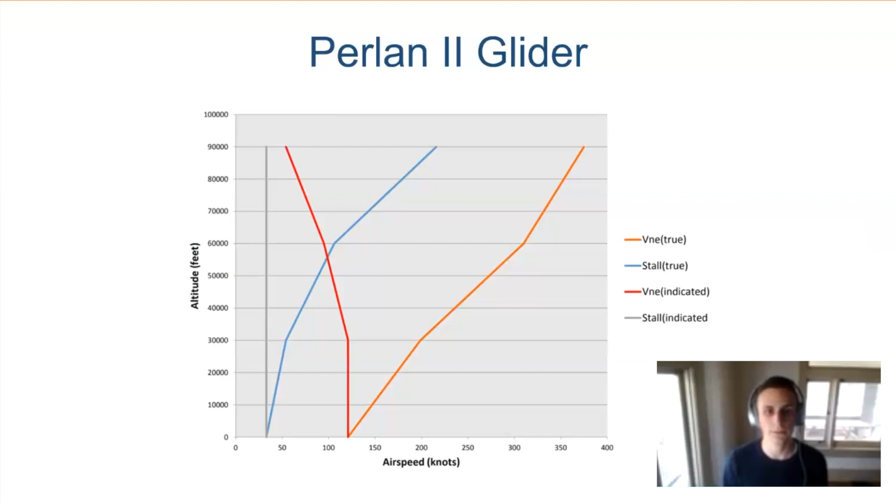Another distinctive feature of the Perlan 2 is that it's pressurized. Following the learnings from the Perlan 1 mission, having a pressurized system allows the crew to go to very high altitude without having to wear bulky spacesuits, which would hinder their ability to fly the glider at those high altitudes. The cabin of the Perlan 2 is pressurized to give a cabin atmosphere equal to flight at around 14,000 feet. And because there's no engine, since it's a glider, there's no compressed bleed air naturally available for the cabin.

The pressurized air instead comes from a scuba tank, which is stored in the aft of the fuselage. At 90,000 feet, this gives a pressure differential close to 8.5 pounds per square inch.

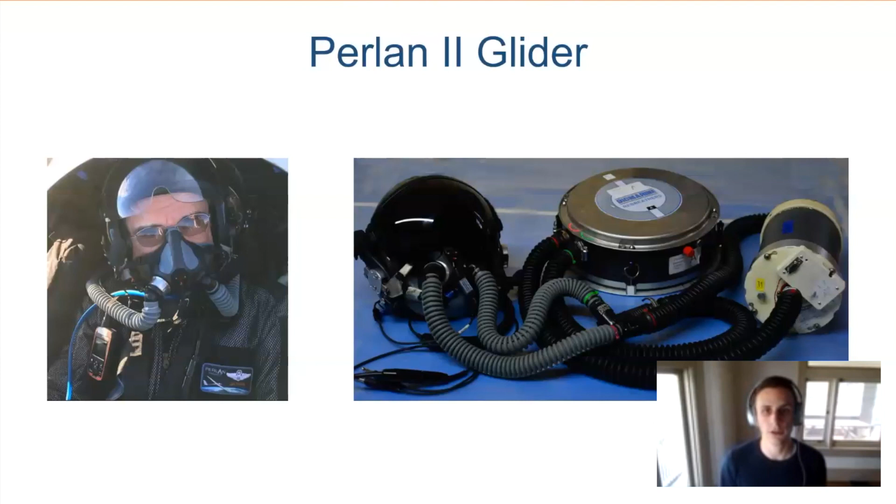Another distinctive feature of the Perlan glider is the flutter system, which we use to expand the flight envelope of the glider. As discussed earlier, the Perlan 2 glider is and will continue to operate very close to the boundaries of its flight envelope, especially at the higher altitudes.

These are also flight conditions that have never been experienced by similar aircraft. There have been extensive ground vibration tests and computer predictions regarding flutter, but to expand the envelope and make sure that safety is our priority, we actually perform more tests every time we expand the envelope at new altitudes, to make sure that the response of the glider matches the ground vibration tests and the computer predictions.

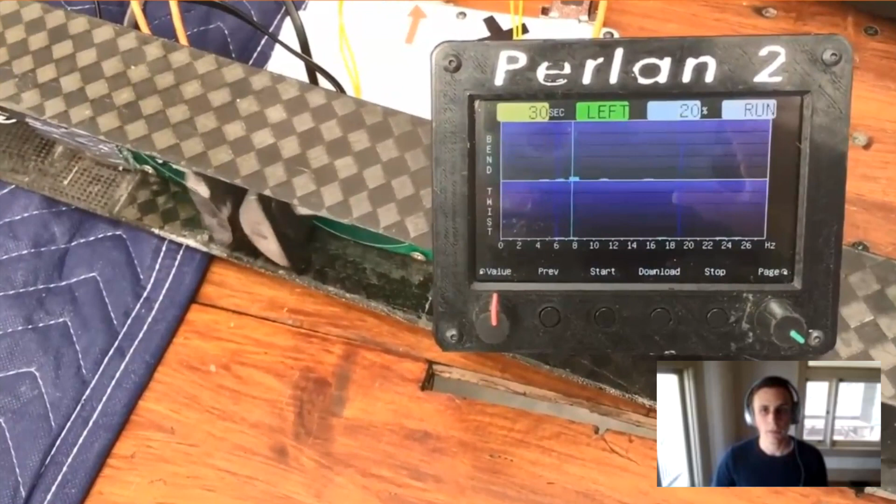We have oscillating masses in the spar of the glider, as well as in the tail. Those masses oscillate around the spar, and then we have accelerometers. So they introduce vibration onto the aircraft, and then we have accelerometers placed all around the airframe that measure those induced vibrations and check whether they are damped as predicted or not.

This test is performed in flight, and then the readings from the accelerometers are transmitted directly to the ground via telemetry and analyzed on the go. This is crucial for us because it allows us to clear multiple test points during one flight.

Let's say this is the first flight, we go to 60,000 feet. Then we can do the test points at 60,000 feet, and then have the results of the analysis directly, and move on and go up to 70,000 feet. It's very important for us because it means that every time we reach a new altitude level, we don't have to come down and land to analyze the results, because the number of days, the number of opportunities where the weather conditions are aligned to do those very high flights, are limited. So being able to clear multiple test points on the same flight is crucial for us.

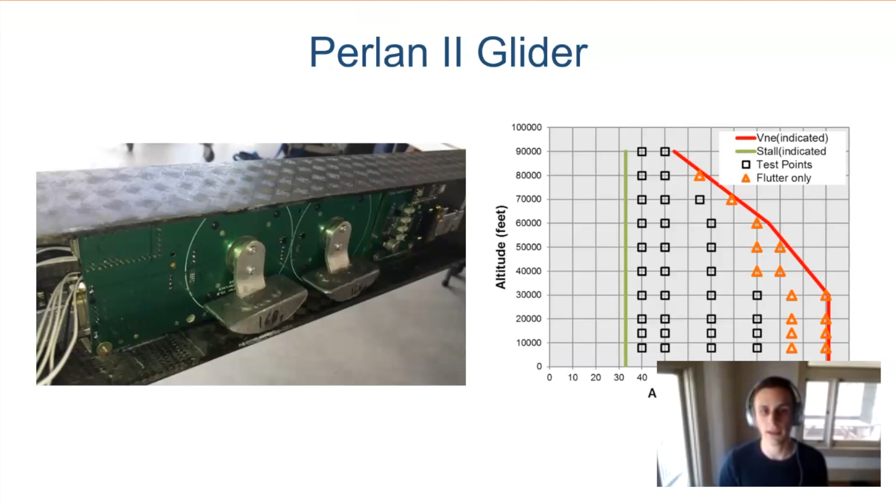Another key feature of the Perlan glider is its telemetry system. We like to joke that it's probably one of the most instrumented gliders that ever existed, because all of the systems I mentioned previously generate a lot of data which must be monitored and recorded during the flight. This data recording and monitoring is done on board the glider.

We have a custom display, which you can see on the right of the picture here, for the pilots to read the data on the air, on the oxygen, on the cabin pressure, on the accelerometer data for the flutter, but also this data is transmitted to the ground in real time.

We have two telemetry channels, one VHF and one UHF. This data is monitored by a ground crew, which we call Capcom or mission control, to assist the pilots during flights to check that everything is fine.

The other role of mission control is they look at the weather models and give indications to the pilots on where to fly to find the best lift.

Also, another use of the telemetry data is during the flights we publish some of it online on a website called the Virtual Cockpit, which means users around the world can follow flights of the Perlan in real time and see live a mission with us and see how high we can go.

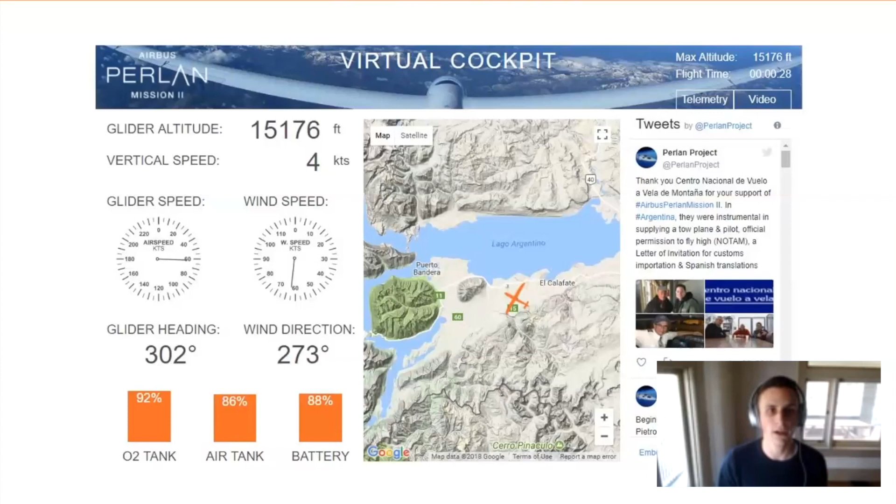A final key feature of the Perlan 2 glider is its parachutes. The Perlan 2 has two parachutes. The first one is located in the tail and it's a drogue chute, meant to be deployed in case of an emergency above 30,000 feet.

Its purpose is to stabilize the glider but allow a very rapid descent at the highest possible descent rate. If you have a problem at high altitude, above the Armstrong limit, so you have depressurization, then your number one priority is to get the pilots back down to a safe altitude where, if the cabin is unpressurized, they can breathe the air normally.

Then there's a second parachute, which can be deployed below 30,000 feet, located behind the aft pressure bulkhead, and it's much larger than the drogue chute. Its purpose is to slow the glider down so that you can have a smooth touchdown in case of emergency landing.

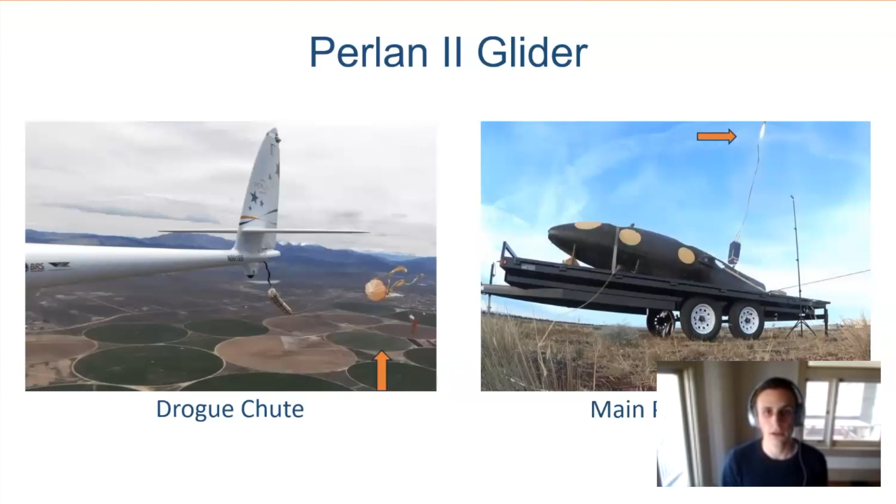That was a brief presentation of the Perlan 2 glider and its systems, which makes it a unique glider. Now I'll talk a bit more about a typical mission. I want to caveat this by saying every mission, every flight is unique, and what I'm saying is roughly guidelines, but generally this is what a mission would look like.

A flight would probably start the day before, where the team would start preparing the glider, and it's a bit more complex than preparing a conventional glider. You have to fill the air bottle for the pressurization, the oxygen tanks for the rebreather systems, install the rebreathers, and perform detailed checks on all the systems on board.

The next steps take place early in the morning of the flight, usually very, very early, where we launch weather balloons about 60 kilometers upwind or on the airport. These weather balloons carry radiosondes, which collect data about the atmosphere, so we can generate this skew-T log-P graph and collect data about the atmospheric temperature, pressure, humidity, and wind speed.

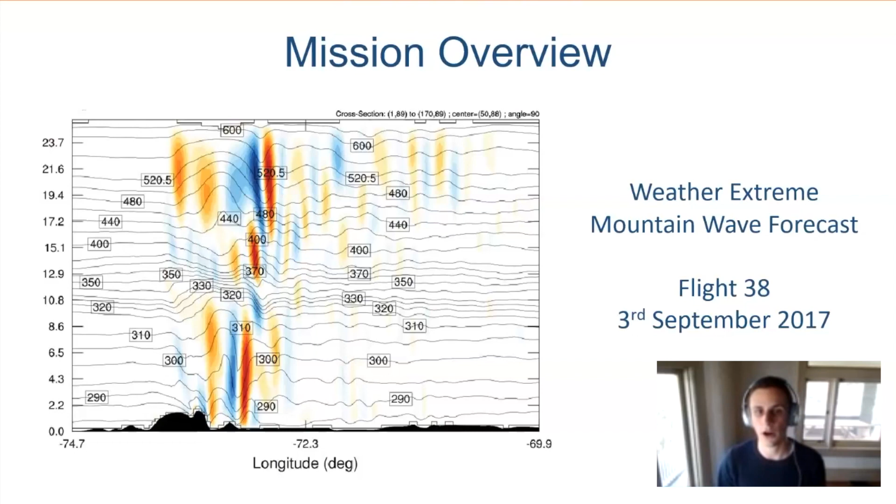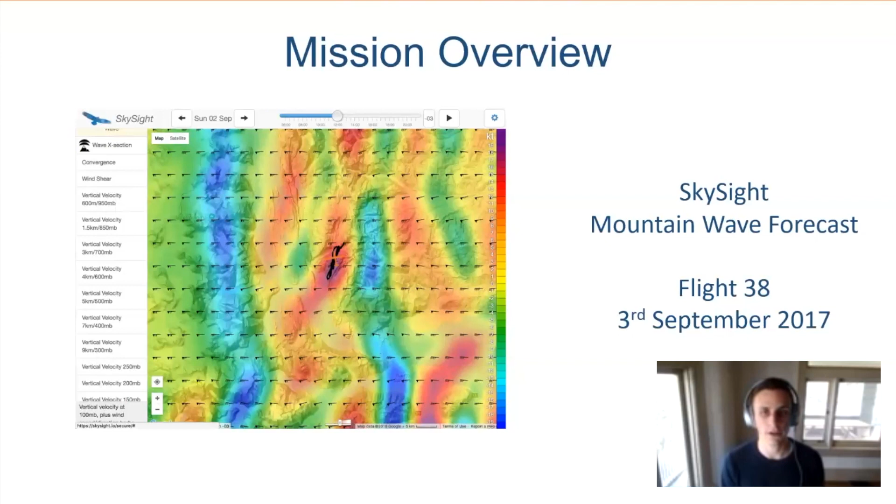This is also a picture of the SkySight model, which does similar calculations. The pilots also have access to the SkySight model inside the glider, so they can direct the glider into the best zones to fly in.

One hour before launch, we have a flight briefing with everyone included: air traffic control in Argentina, because we need special permits to fly this high, the meteorological team, the ground crew, and mission control. We go over the day's test plan and strategy. Then about half an hour before takeoff, we perform the final checks, and the pilots board the glider.

We do extensive ground tests before the flight. We check the pressurization, pressurize the capsule, then depressurize the fuselage, and then take off.

I'll talk a bit about the tow planes, which is also an interesting thing about the Perlan mission. For the 2016 and 2017 campaigns, the Perlan 2 was towed to about 10,000 feet by a regular tow plane into the low altitude regular mountain waves, and then the crew had to climb this regular mountain wave all the way to the top and transition to a stratospheric wave to reach high altitudes. This is what they did for Perlan Mission 1, and also in 2017 when Perlan Mission 2 set its first record, which at the time was 52,000 feet GPS altitude.